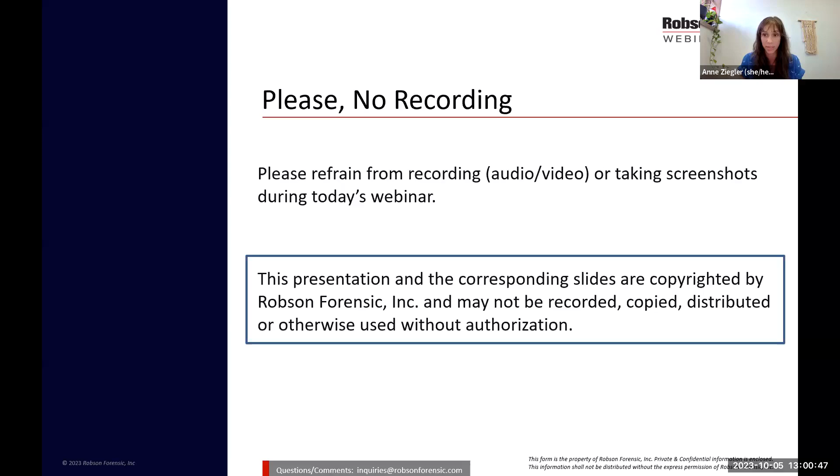So for today, Jeff Tedder will be presenting. There are a number of hazards associated with concrete pumping. Hose whipping incidents are one of them. If you have questions about other concrete pumping related matters other than hose whipping, feel free to throw those in the Q&A section. And Jeff, I'll turn it over to you.

Okay. So we'll start off a little bit about myself. I am a forensic civil engineer with Robson Forensic, obviously. Been with the firm for roughly 2 years. I'm also a licensed professional engineer in 16 states. My focus is in construction safety, which is my professional background. So I spent 17 plus years managing construction projects, mainly large water and wastewater treatment plant projects for self-performing general contractors.

So I've built everything from $4.5 million projects to $300 million projects. Managed or supervised up to 1,000 concrete pours. It's a pretty decent estimate. And of those, about 300,000 cubic yards of concrete. Most of that was pumped. On quite a few of those jobs I served the roles of either pour supervisor or site supervisor.

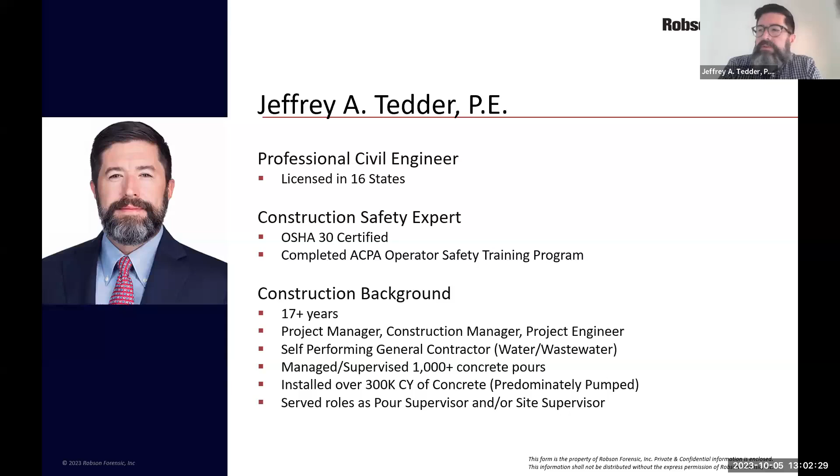So what we cover today: a real basic overview of what concrete is, what the pumping mechanics are. We'll do a review of equipment basics, how a concrete pump works, then anatomy of a hose whip, common causes of hose whipping incidents, responsibilities of the concrete placement team, which is important. I think that's a common theme through these incidents that I'd like to spend a little bit of time focusing on. And then helpful information for the expert that's helping you investigate the case.

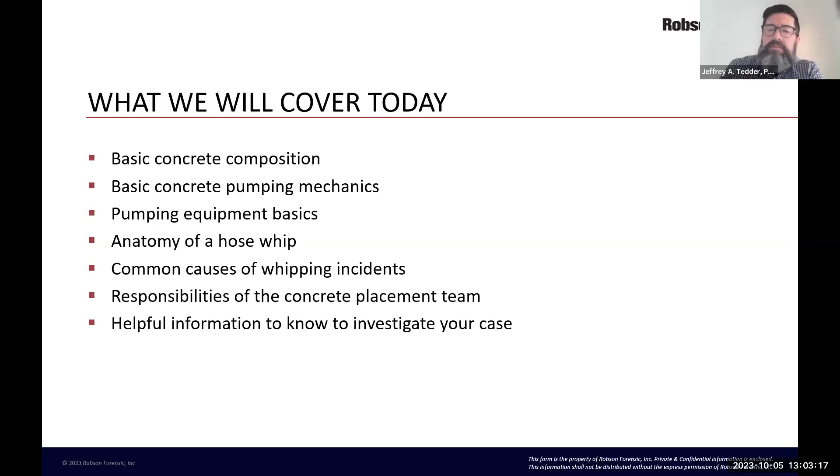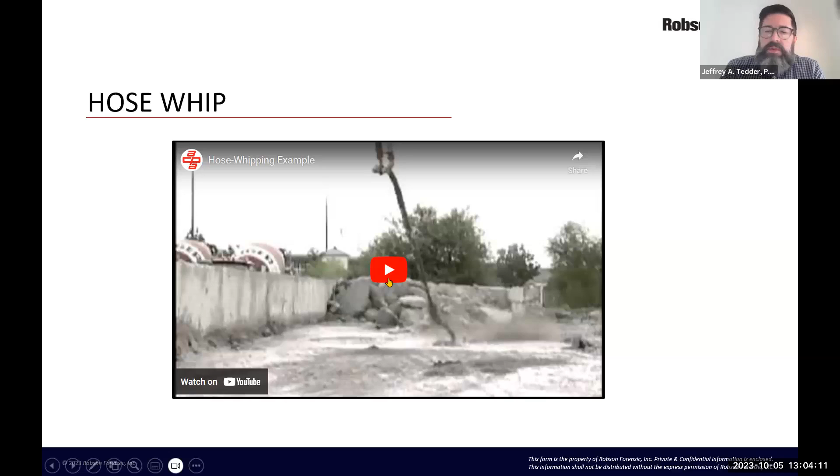Before we kick that off, I'm going to show you a video, a little background on this video before I play it. American Concrete Pumping Association, ACPA, they're the standard organization for concrete pumping in the United States. They certify concrete pumpers. They're kind of the authority on all things concrete pumping. They set up this example concrete hose whipping incident. This is a controlled environment, one of their member organizations. Important to note that no one was injured in this video, but I'm going to go ahead and play this so you guys get an idea of what a hose whipping incident looks like.

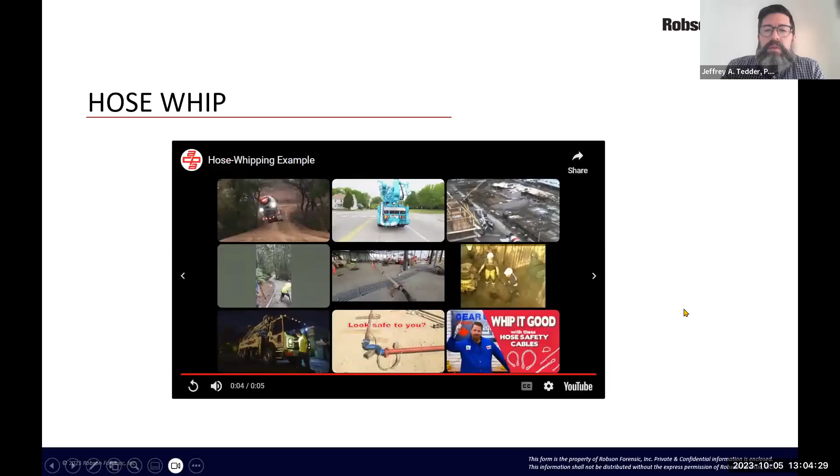All right, so I'm going to move forward. We'll roll that one more time. That was accidental, but so as you note in the video here, pretty violent reaction. It happens almost instantaneously. One of the things that I'll point out while we're here, one of the most dangerous times during a pumping operation is at the beginning when you're priming out the pump. This is kind of what you want the area to look like. Nobody should be anywhere near the end hose when you're priming out.

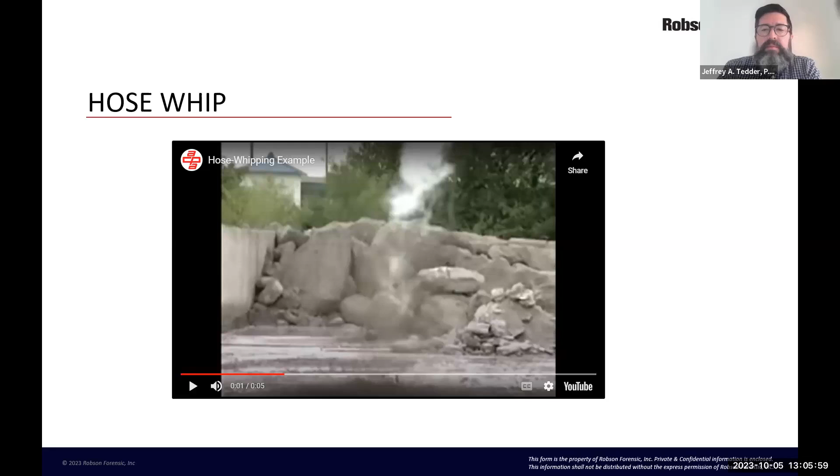The other thing I want to point out here, and there's a diagram later on in the slideshow from ACPA, is what we define as the hose whip area. The end hose is 10 feet to 4 meters, so between 10 feet and 13 feet, depending on the manufacturer. And that hose whip area where you want to keep people out of to keep them safe, the length of the end hose would be your radius. So think about a circle. If it's a 10-foot hose, you want people to stay 10 feet outside of where that hose is hanging during prime out. And anybody that doesn't necessarily need to be there during placement also needs to be kept out of that danger area.

So what is concrete? You guys are familiar with concrete. You walk on it on the sidewalks. Your house's foundation is quite possibly concrete. You drive across concrete bridges. When you look at it, in general, it's got a fairly consistent finish. You can't see the aggregate. It'd be easy to assume that it was a homogeneous mixture. It's not. It's a non-homogeneous mixture of coarse aggregates, so think stone, rock, fine aggregates, sand, cement, and water. The air is naturally occurring when you mix the mix, and concrete can also come with various admixtures.

A couple that are important here when we're talking about concrete pumping would be a high range water reducer or a retarder. Both of those admixtures prolong the life of the concrete, delay the setup, and improve pumpability in general. Admixtures are generally used on larger projects. Residential homes, you'll probably not see admixtures in those mixes.

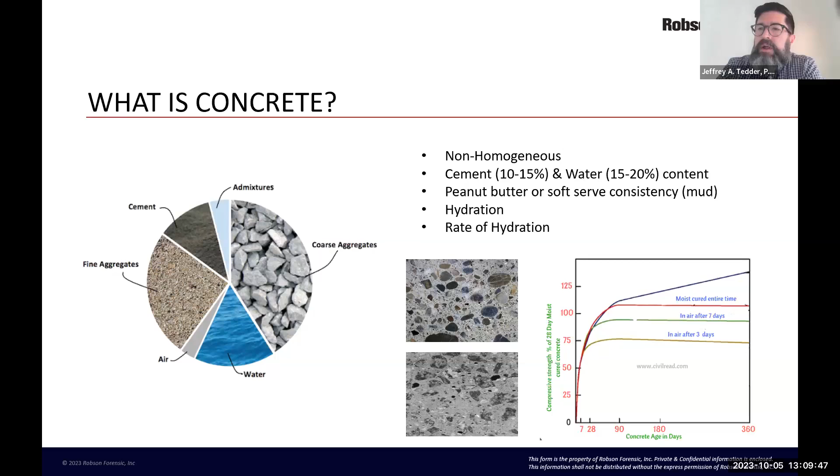Concrete will maintain its workability in general for 2 to 3 hours. So once the water hits it at the batch plant, you're on the clock. If you wait too long, it's going to be unsafe to pump. Pump concrete mechanics. Like I said, the consistency of the concrete is important. If it's too wet, you risk the potential that the concrete will segregate. If it's too thick, the pump's not going to push it.

The diagram below gives you an example of the velocity profile of concrete as it moves through the walls of the concrete piping system. There's friction that acts between the concrete and the walls of the pipe. As you move closer to the walls of the pipe, that friction is greatest and it creates a drag.

So it's important. I mentioned when it's too wet, the aggregates can settle out. As a large aggregate settles out, the friction between the aggregate and the wall of the pipe is more likely to cause a plug condition because the friction is going to be greater because particle size is greater. Ease of flow is dependent on what we refer to as the water cement ratio. That's essentially just the amount of water that's been added to the mix. Let's see.

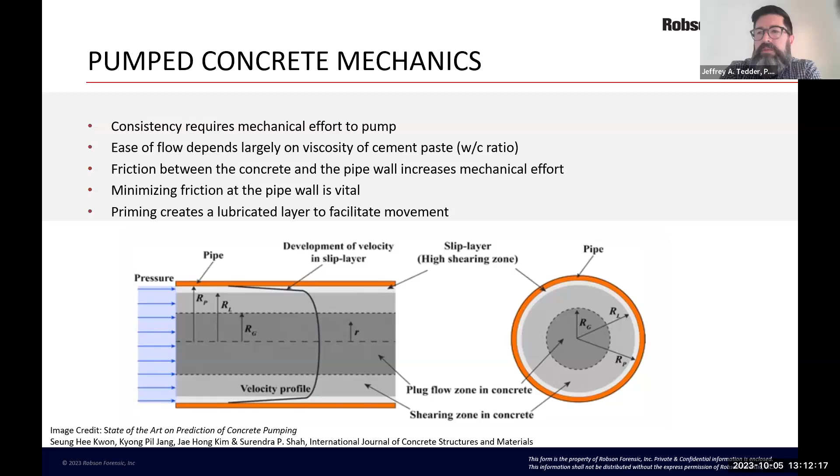Pumping equipment. So there's lots of types of pumping equipment. They fall under 3 general types. In the top left corner is a trailer pump. We're really not going to get into those at all today. But the hazard of a hose whipping incident is similar in the use of that type of equipment. And then you've got the truck mounted boom operated concrete pump, which is the middle photograph on the left. That's where we're going to spend most of our focus.

The photograph below is a placement boom. So essentially it's the boom from the truck removed and put into place. There's no pump associated with it. You'd have to use a secondary pump, either the trailer pump or a truck mounted boom pump, to supply the energy to place the concrete.

So in general, the concrete truck backs up. On the back end of the truck here is what we refer to as the hopper. That's this gray thing. That's where the truck fills the pump truck with concrete so that it can be distributed to where the concrete finishers are placing the concrete.

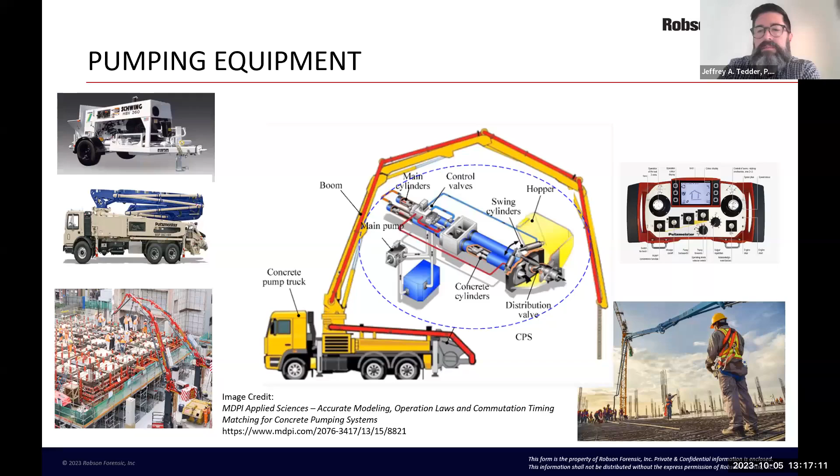So it's important that we have somebody back there at the hopper, and it's important that you understand that the operator's primary focus is to watch the guys at the end hose and make sure they're safe. So we've got to have somebody else stationed in the back at the hopper. The guys that are driving the mixer trucks, the delivery drivers, they're trained to monitor the concrete in the hopper, and they should be trained to notify the pump operator of a condition if air is introduced. And they should be trained to push the emergency stop button to make sure a whipping condition is not created.

So moving forward, anatomy of a hose whip. There are three necessary conditions. Air must be in the delivery system. There's got to be something pushing the air, and there has to be a restriction. So air is a gas. It's compressible. Concrete is, I would call it, a suspension of solids in a liquid. It's not compressible. So as the pump strokes, it continues to push concrete behind air after it's been introduced into the system. If there's a blockage in front, the air will compress. As it compresses, the pressure builds, which leads to, as we saw in the video, a violent explosion of gas.

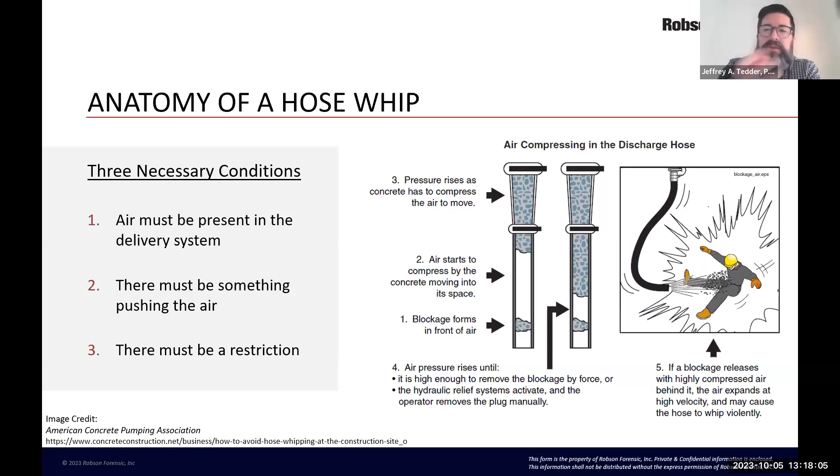I'll go ahead and go to the next slide. So this is a good visual representation from the American Concrete Pumping Association, one of their documents. And what this is showing is the relative pressure in the line of an air pocket as it's been introduced, and the compression of that air. So at the top there, you see 800 psi. At 800 psi, that air pocket's 2.5 inches long. So as you start to move towards the end hose, that air is going to expand as the restriction is removed.

So concrete pump trucks generally will operate at a pressure of 1,000 psi; that's pretty standard. Big trucks have the capacity to pump up to 2,000 psi, which is a pretty extreme pressure. When you have a plugged condition, or a blocked condition, the concrete pump is going to continue to pump, if you don't stop it, until that restriction at the end of the line is freed.

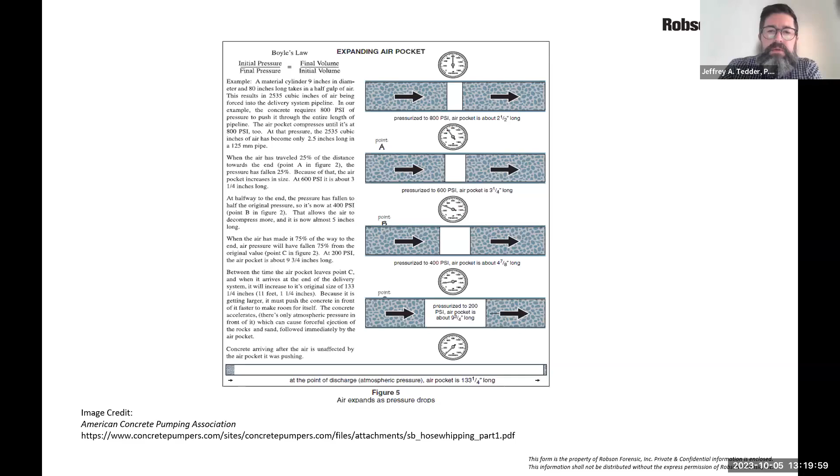Common causes of hose whipping incidents. Air has to be introduced in the system. We talked about the hopper and how important it is there. That's one way air's added to the system. Another common way that air is added to the system is through the end hose. So when you're pumping concrete, the boom is extended out. The end hose is hanging vertically.

If you stop the concrete pumping for any reason for a short period of time, the concrete that's in the end hose, when you stop the pump, will fall out under gravity. A portion of that may be retained in the end of the end hose. The concrete that slid out, that was in front of the plug that's now been created, that volume is now filled with air. Okay, so that plug remains in the end hose.

As you go to start repumping, concrete starts to move forward. You compress the air, it pressurizes, and it explodes. Those are two of the common ones. The concrete mix might not be suitable for pumping. I talked about that a little bit. The mix consistency may be wrong, too wet, too dry. The fine aggregate's not properly graded. Coarse aggregate's too porous. So what happens there?

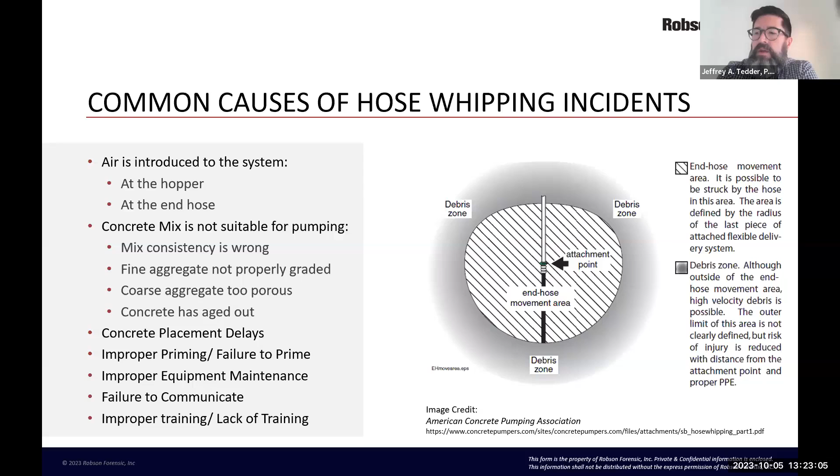Pipe sections on the boom are roughly 10 feet long. They're connected by couplings. Those couplings have gaskets. One of the big problems is that if you don't maintain those gaskets, they rip, they tear. You can either lose water as you're pumping the concrete, which can be a problem, obviously, or you can introduce air into the system that way.

Who's responsible? ASME B30.27. In 2014, they updated the standard. This is kind of the standard in the industry for concrete pumping. So everything you need to know about concrete pumping and the way things should be done are in this document. And it outlines the responsibilities of different parties on a concrete pour.

Prior to 2014, when this was issued, this whole responsibility matrix, if you will, was not well understood, still not really well understood. There's a general misconception that you hire a pumping contractor, the pump operator shows up on site and he's responsible for everything. That's just not the case. There's responsibilities across the board.

Obviously the operator's primary focus is the safe operation of the equipment, and he's responsible for making sure the people within the danger zones of the equipment remain safe. So those are his primary responsibilities. He needs to operate the truck within the manufacturer's requirements, within industry standards. He's got to make sure people are safe.

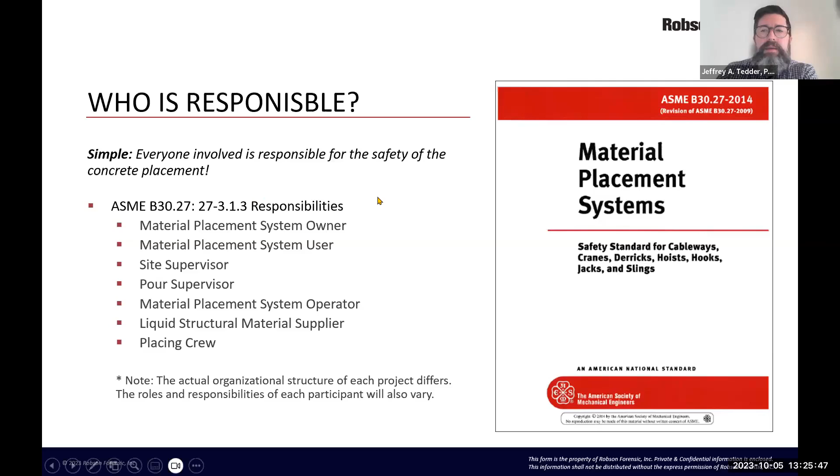There are countless ways that a project can be organized. So it's important to consider that as we evaluate the responsibilities of the individual parties on the specific project at hand. So, information helpful to an investigation. I've got a lot of bullets here, but just to summarize, it's important that we know first that the concrete mix that was proposed for the project was pumpable. So we'd like to see the design mix that the engineer put together to review it to make sure it's pumpable.

The next step would be to look at the concrete that was actually provided by the batch plant. Did it meet the engineer's design requirements? So any kind of QC information we can get, batch tickets. They've got to maintain records for the aggregates they store on site. They've got to tell you on the batch ticket where the materials came from, the sand, the aggregate, that kind of stuff. Maintenance records for the truck itself.

You want to make sure the operator of that piece of equipment, the pump company, has been properly maintaining his equipment. Any kind of records and certifications of the pump operator. The owner's manual for the specific piece of equipment is important. A lot of what we're talking about that's covered in ASME B30.27 or in OSHA or ACPA is more clearly defined for that specific piece of equipment in the owner's manual.

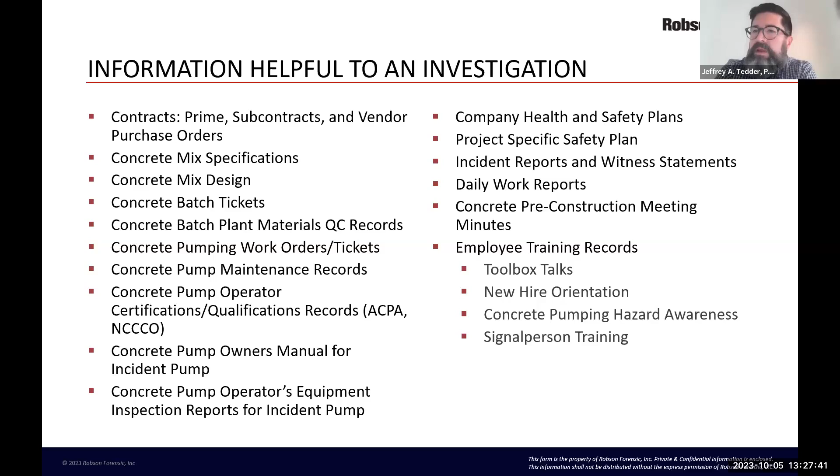A couple questions. So in terms of assessing the quality of the mix, can that really be done if it's been a number of years since the incident occurred? And how would you go about that? Sure. So, primary documents there that we want to see are the batch tickets from the batch plant. They'll give you the relative volumes of each of the constituents that were added. And then the batch plant should be maintaining records on who supplied the cement, who supplied the different aggregates, and they should have maintenance records for the constituents, so the aggregate and stuff like that.

Fair enough. And now, what other types of incidents, aside from hose whipping incidents, are there with these pump trucks? Yeah, so the number one cause of fatalities with concrete pump truck operators is incidental contact with overhead power lines. So we've got experts, electricians, electrical engineers that can address that type of hazard. Ground conditions, where a concrete pump truck was set up improperly based on poor ground conditions, and as the boom extends out, the concrete pump could collapse. We see a fair number of those incidents.